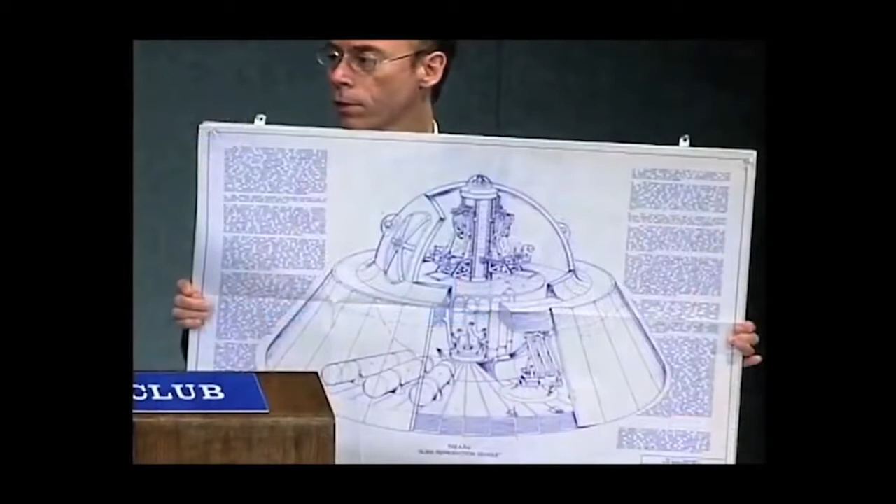He'd spent over a decade in research and development on the main focus of the NPC event, technologies connected to UFOs and extraterrestrial vehicles. His detailed technical illustration of a purportedly reverse-engineered alien craft, the Fluxliner, a strange flying disc shown at a secret US Air Force air show in 1988, was a highlight of the conference. These discs were hovering off the floor without any visible means of support. They were referred to as alien reproduction vehicles, also nicknamed the Fluxliner because they used high voltage electricity.

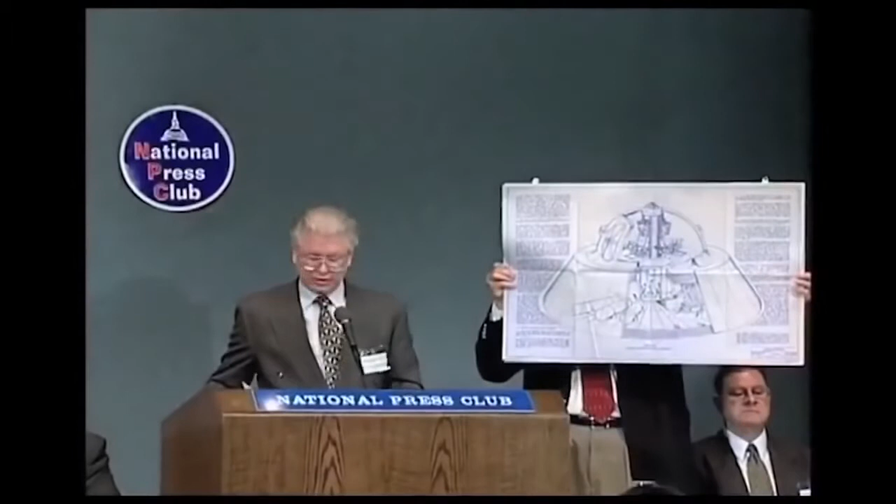This is a diagram that I made based on a sketch that Brad Sorensen did for me in rough form, and subsequently cleaned that drawing up and made it much more accurate. This is his story. He says, you know, I gave you the basic verbal description of what I saw. But somehow or other you've taken all the information I gave you, and you have graphically interpreted it into an image that is so close and so accurate. He said, this is really dangerous stuff here.

Deanne Divis with United Press International. Could you please address the vehicle that there was a drawing displayed of? Why would this vehicle be on display at an air show? What is the power source that you are asserting is going to be so very useful? And how can you determine that this vehicle is not something that is being developed by a government agency? In fact, I think that was the testimony.

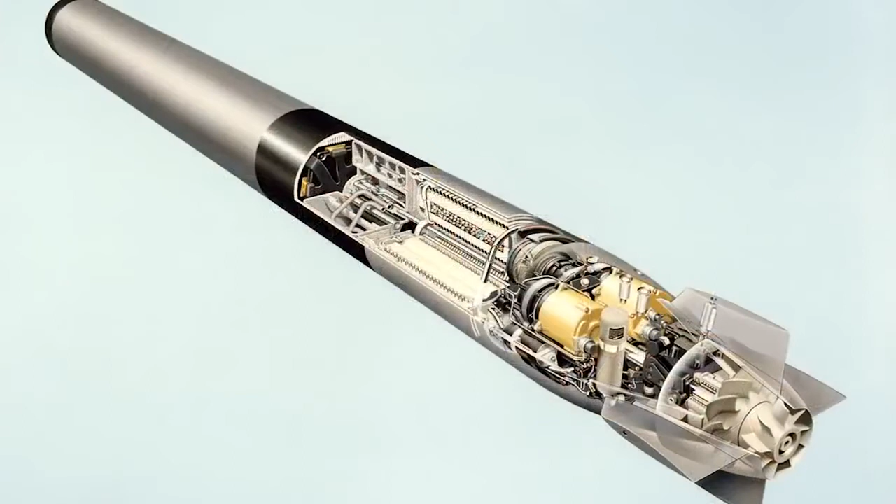At the time, this was around 1985, 1986, and I had been freelancing for about 4 years at that point. Done a lot of work for Lockheed, a lot of work for Rockwell, and a little bit of work for Boeing. And so I was establishing a reputation and had occasion to talk to an awful lot of experts in the field, various parts of the aerospace industry. So I had an idea of what was going on in terms of the technological development that was occurring in the industry at the time. Worked on some conceptual artwork showing cutaways of some of the weapon systems and how the components inside those weapon systems interrelated to one another. I was given a lot of information.

Many times I was asked to create illustrations for clients based on just verbal descriptions of what they wanted to see, because a lot of it was conceptual artwork that was supposed to put across the idea that, say, a particular aircraft that they were designing was going to be extremely fast, so it had to have all the sort of dynamic characteristics of what a really fast aircraft would have, and I had an idea of what these things looked like. So I was subscribing to some of the trade publications that were available at that time, like Aviation Week and Space Technology, and knew a lot of people at the magazines, test pilots, editors, and things.

By the mid-1980s, he was a very successful professional artist living in Rialto, California. He had a full slate of high-profile projects and had become a very sought-after and respected talent in a very crowded field of designers and artists. Despite living in the era of Reagan and disco, things were going very well for Mark. Then, in the autumn of 1988, things took a turn for the weird.

Well, it turns out that this was in October that the magazine hit the newsstand. It was a November issue of Popular Science. It was called the Mach 5 Spy Plane. And a friend of mine from college, Brad, had seen this cover illustration and had opened up to read the story, and he recognized my name, and he called the art director. He passed along my phone number, and the next thing you know, I get a phone call, and this fellow calls up and says, "Hi, Mark, it's Brad. Remember me?" And I said, "Yeah, we were in the transportation design curriculum at Art Center in Pasadena when we studied car design." So we got reacquainted, had lunch together.

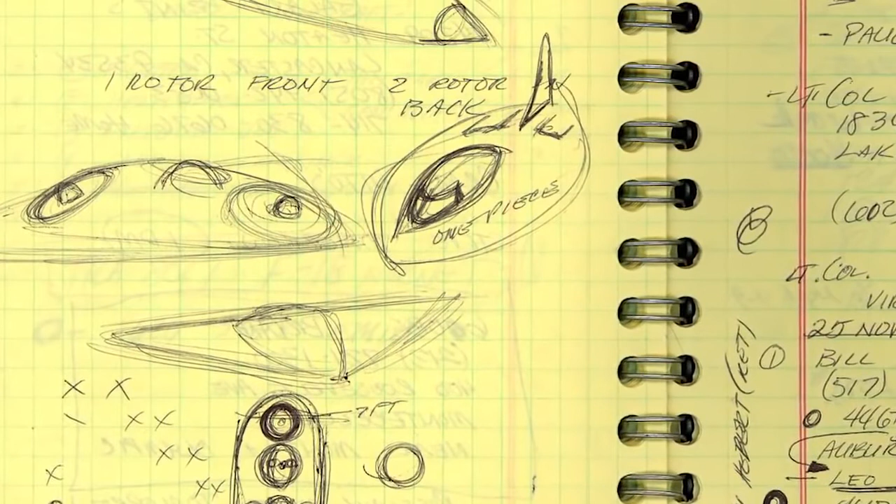And then he described a number of sort of odd-looking hovercraft and troop transporters and things that were basically just kind of jazzed up, advanced hover vehicles of one kind or another. And after going through all of this, I said, "Well, even this doesn't sound all that extraordinary. I mean, is there something else?" And he says, "Well, yeah." He says, after they had the main little dog and pony show, they pulled back the curtain and there were these 3 flying saucers hovering there.

And I couldn't believe my ears. I said, "No, wait, did you say flying saucers?" He said, "Yes." And I said, "Well, what do they look like?" He says, "Well, it looked like something from the 1950s, like a jello bowl, flat on the bottom, sloping sides, a little terrace around the middle, then a dome on the top with all these little bubbles around the top, and a door that looked like something off of a submarine, you know, with the little pins that go out into the frame of the door, and the big wheel that you turn to tighten it, all this kind of stuff.

The smallest one was about 24 feet in diameter at the bottom end of the craft. The medium-sized vehicle was about 60 feet in diameter, and the largest was somewhere between 125 and 130 feet in diameter." I said, well, what were they doing? Were they just sitting on the floor? He says, no, they were hovering. There was no landing gear, nothing holding them up, no cables. They were just hovering.

There was a 3-star general that was part of the presentation. When they pulled back the curtains and these three flying saucers were revealed to the audience that had been brought there to this hangar, this general got up and he was describing these vehicles. He described them as alien reproduction vehicles, ARV for short.

They also had a nickname for the aircraft. They called them Fluxliners. Now, flux is an electrical term for a high electrical charge. So, high electrical charge liner, a Fluxliner. And so he got kind of scared. He stopped talking. And so I said, well, let's have lunch. He was nervous about talking about it on the phone.

So I go over there and we start talking. And as he's describing this stuff, he's describing the different features that he had seen. And well, how do you know that? I mean, if you could just look at the outside of the vehicle, how do you know what the inner workings is? He says, well, they had taken some of the panels off the outside so you could see the inside, what the components looked like.

And he said it was remarkably simple. There wasn't that much to it. And I said, you were able to figure out how it worked from that? He said, well, no, they had an easel next to it with a drawing, a cutaway drawing, that showed some of the internal components, how they were arranged and oriented to one another.

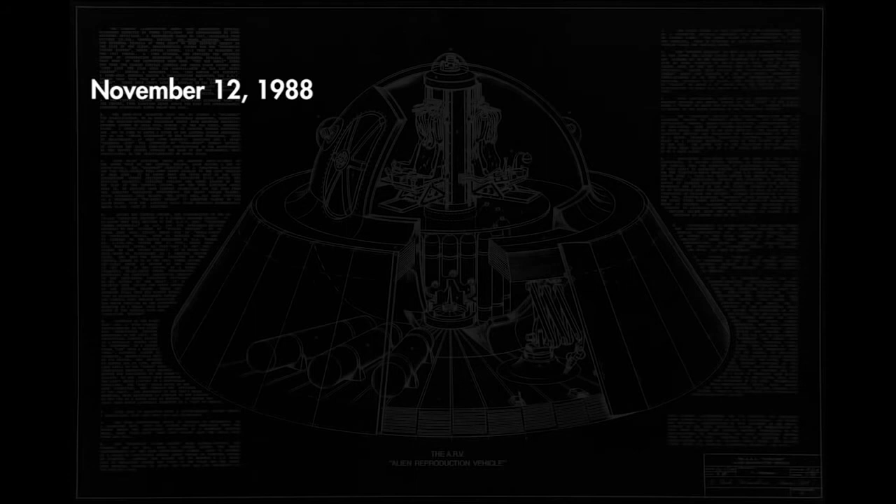So, according to his account, on November 12, 1988, Mark's friend inadvertently gained access to a highly classified airshow where the featured hardware of the event was real flying saucers. They were really strange looking, but appeared functional and were named to suggest anti-gravity and reverse-engineered alien technology. An official present stated they could travel faster than light.

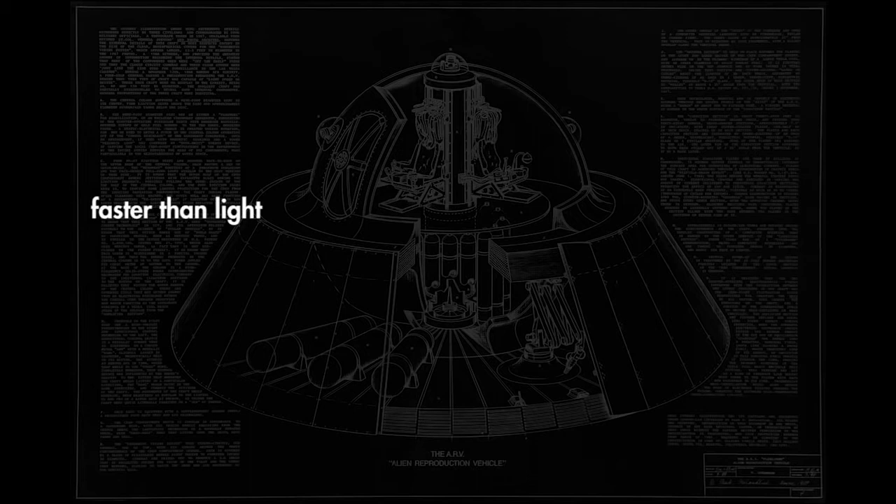Despite their futuristic performance capabilities, these appeared to be stripped-down, road-worn working prototypes, which had seen practical operation for years. If this were the case, they were crude but tangible proof of concept for a staggering leap in aviation technology.

They used extremely advanced electromagnetic or field propulsion, as opposed to solid or jet fuel, nuclear power, or any other commonly known conventional means. It also meant our government and at least one other major defense contractor, Lockheed Martin, had been developing and deploying functional systems along these lines for many years.

To both McCandlish and Brad, who'd been working professionally for some time within what they thought were the highest levels of aeronautical design, this odd system was a sucker punch from the future. Apparently this had had a really, really serious impact on Brad, and he really seemed kind of stunned by what he had seen.

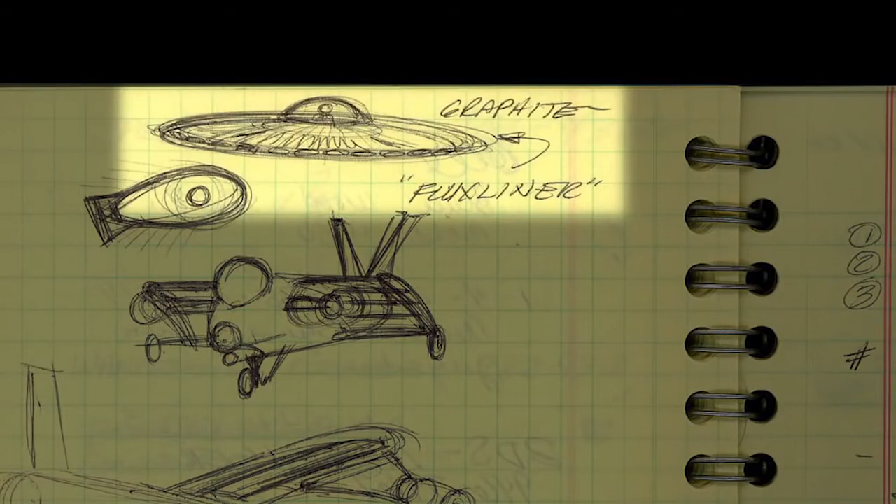So we got together for lunch, and I was doing all these idea sketches of what he described to me about how the components related. And I had your stereotypical sort of lens-shaped flying saucer like you see in more modern movies and stuff. And he said, "Oh, no. It's real simple. It's flat on the bottom, sloping sides like a section taken out of a cone, a little ledge, and then a dome on the top."

And he said the dome is actually the top half of a crew compartment that's like a big ball. I'm pretty sure that was about 12 feet in diameter. There's a central column that goes down through the middle. There's like a flywheel thing on it, maybe 6 to 9 feet in diameter. There's 4 ejection seats that are all back to back on this central column above the flywheel type thing. And he says a bunch of oxygen tanks in there that are all around the bottom.

And he said the bottom is this huge capacitor array. It's probably maybe 12 to 14 inches thick. It's shaved off at an angle on the edges, looked like it had been put on a big giant milling machine, and they milled off the edges at a 35-degree angle. He said there's a series of these plate capacitors.

I said, "Well, do you think that this is functioning like the Biefeld-Brown effect, like these experiments that were done back in the 60s with levitating things with electrostatic fields and stuff?" He said, "Well, that may be it," but he says, "They told me, one of the things I saw was that it was using zero-point energy, it was using scalar energy." Really?

It's cool, huh? Zero-point energy. I save the best inventions for myself. Well, I'd been corresponding with Tom Bearden for about 8 years at that point. We talked many times, mailed letters back and forth, talked on the phone and things.

Okay, so what we have is a very strong argument that neither the scalar photon, that is the time-polarized photon, nor the longitudinal photon, which is over in 3-space, are individually observable. But if you somehow can combine the two, they are observable as the instantaneous quantum potential.

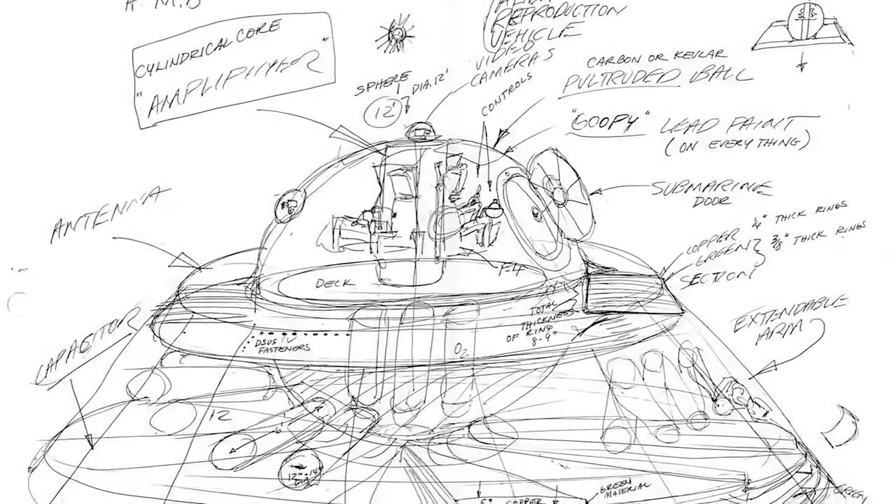When Brad finally became frustrated with my questions, he sat down while we were in his office together, and he did this rough sketch, which I still have to this day, 22 years later. Right where we were sitting at his table, he sketched it out with an ink pen on a piece of legal-size white paper, and put some little handwritten call-outs around

the edges that described the number of capacitor plates in each one of the little sections, that they were so wide at the end, and the crew compartment was definitely about 12 feet in diameter. He just put all these things down as close as he could remember to the way they existed. And so I sat down with all this information, and I just began drafting it out.

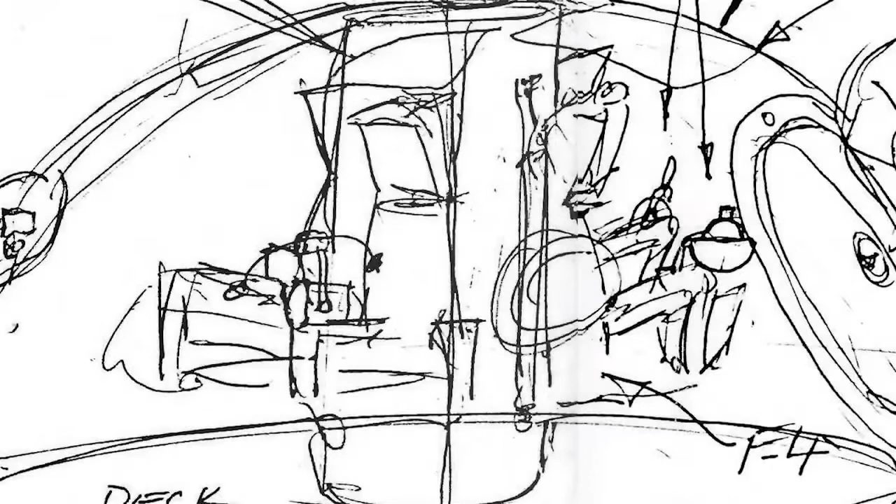It was at this point Mark began putting his formidable skills as a conceptual illustrator to work in uncharted territory. Taking Brad's eyewitness account, detailed descriptions, and rough sketches of the ARV, McCandlish began refining aspects of the components his friend described and piecing together an ever more precise rendition of the craft.

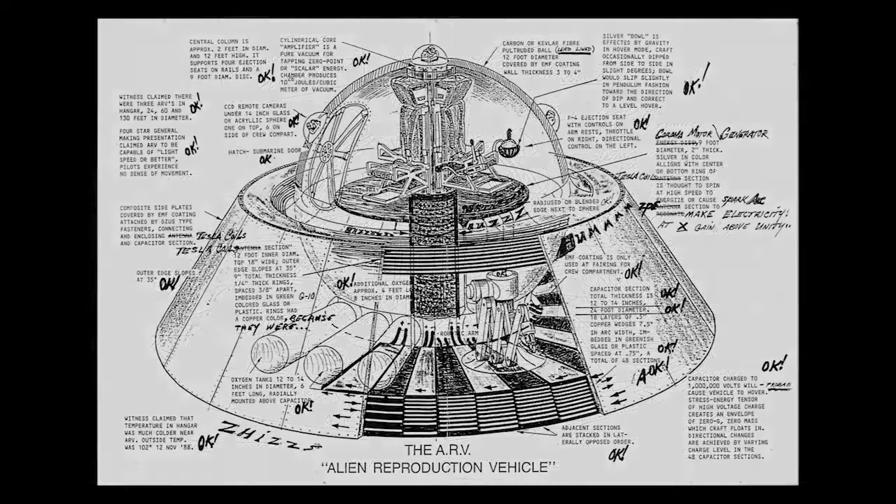Over the course of the next few years, he generated a series of drawings, culminating in the Fluxliner cutaway blueprint, one of the most notorious images in the history of ufology and the mysterious realm of black-budget aircraft.

I'm Jesse Ventura, and this is Conspiracy Theory.

This was called the Fluxliner. This is probably the strangest one you've shown me yet. This actually flies? It actually flies on the principles of high voltage electrical charges.

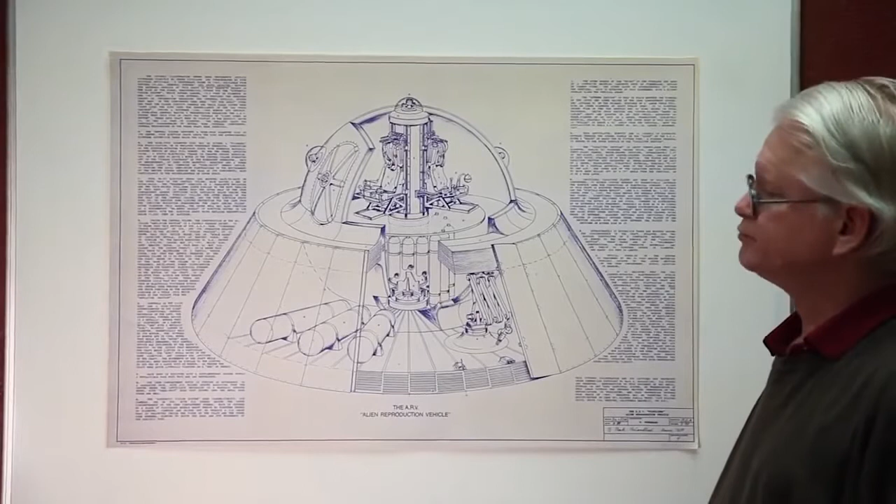This is the original, one of the original blueprints of the alien reproduction vehicle, which I produced in March of 1989. It was put together by accumulating a lot of verbal testimony from Brad and later from a number of other sources, including Kent Sellen and some other people that I talked to who had some contact or information about the vehicle.

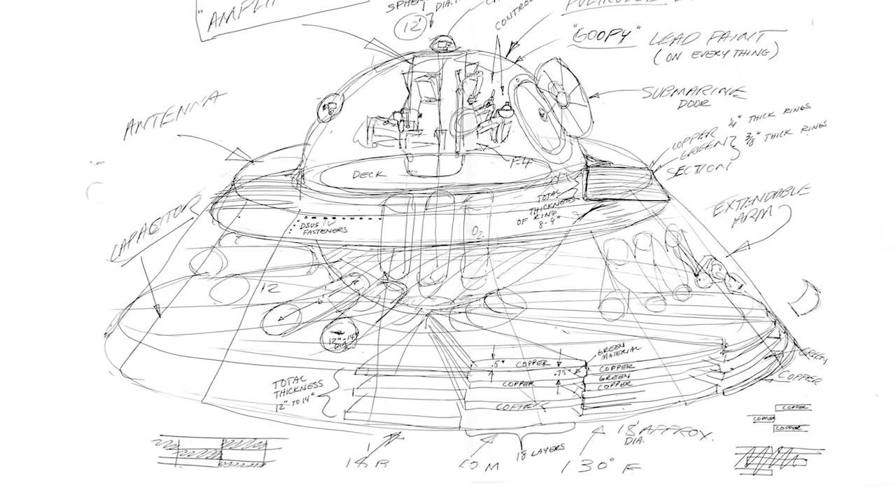For Mark, his friend Brad's initial account was a fascinating story with a degree of veracity and plausibility, worth exploring and doing some research, but was after all just one man's tale of a fairly unbelievable event, concept, and machine.

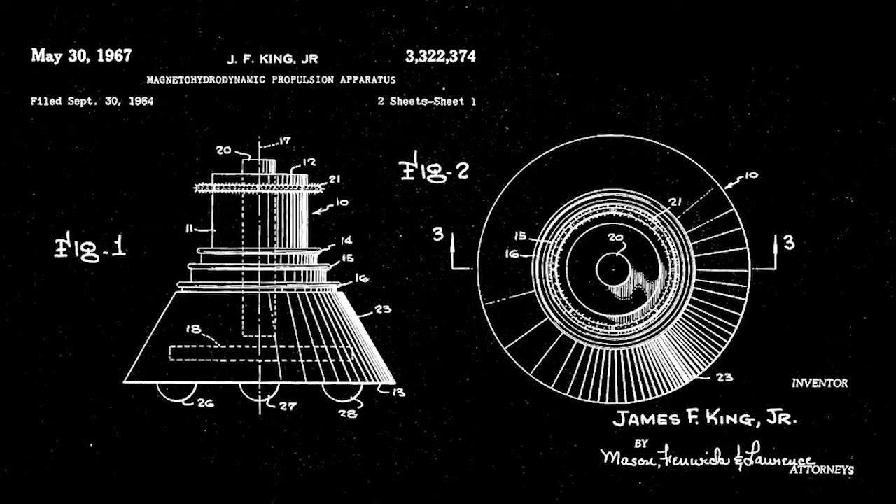However, this subsequent research led Mark to some other very compelling eyewitnesses, official documentation, including numerous scientific patents, and other sources, such as respected quantum physicists, which finally convinced him of the likelihood that the ARV might be a very real thing.

The first verification of the story that I picked up on the alien reproduction vehicle was around 1991, 1992. It was the first air show at Edwards Air Force Base where they actually had the B-2 stealth bomber on display.

In the course of that air show, I had occasion to join up with some clients from Rockwell International, and they introduced me to this fellow who claimed at the time that he was working with the Air Intelligence Agency. His name was Kent Sellen. He claimed that he had inadvertently seen this same craft at Edwards Air Force Base North Base facility in 1973.

And I said, when, how, where, what were the circumstances? He says, well, I was a crew chief. He said, I worked on Bill Scott's plane when he was a test pilot. And he says, one night my shift supervisor said to me, go out to North Base. They've got a power unit out there, a ground power unit for an aircraft that's leaking or failed or something, so we need to take a tow vehicle out there, go out, pick it up, bring it back.

Well, instead, what happened is he comes up off the dry lake bed, rolls right up on the tarmac, and is going down these rows of hangars. They're all Quonset-style hangars back then. And he stops in front of the first one with the doors cracked, expecting to find this defective ground power unit, and what does he see? He sees this flying saucer sitting in the hangar, hovering off the ground.

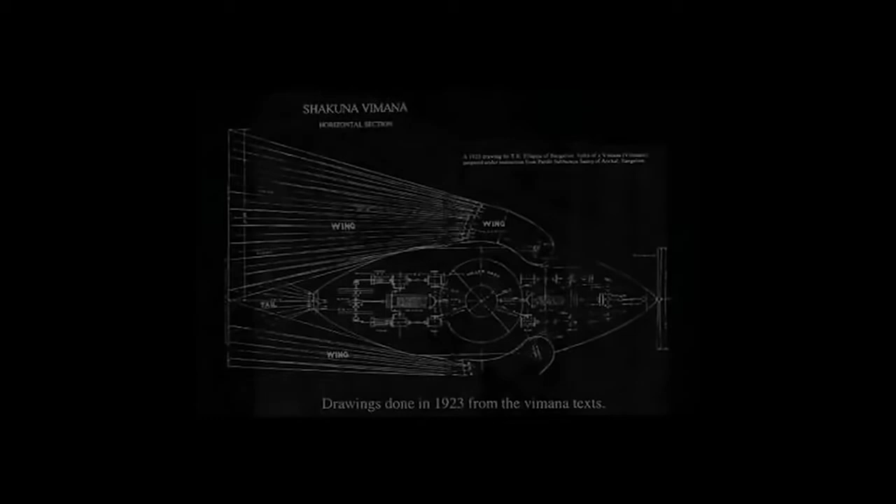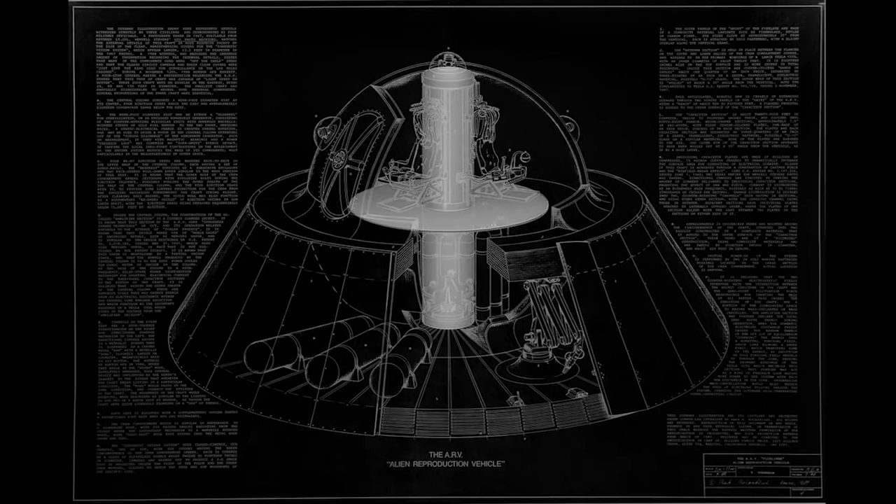Strong and durable must the body of Vimana be made, like a great flying bird of light material. Inside, one must put the Mercury engine with its iron heating apparatus underneath. By means of the power latent in the Mercury which sets the driving whirlwind in motion, a man sitting inside may travel a great distance in the sky.

One of the things that they described when you read up on the literature surrounding these so-called Vimanas was the so-called Mercury vortex or Mercury turbine engine. I see the word Vimana. Can you describe how that relates?

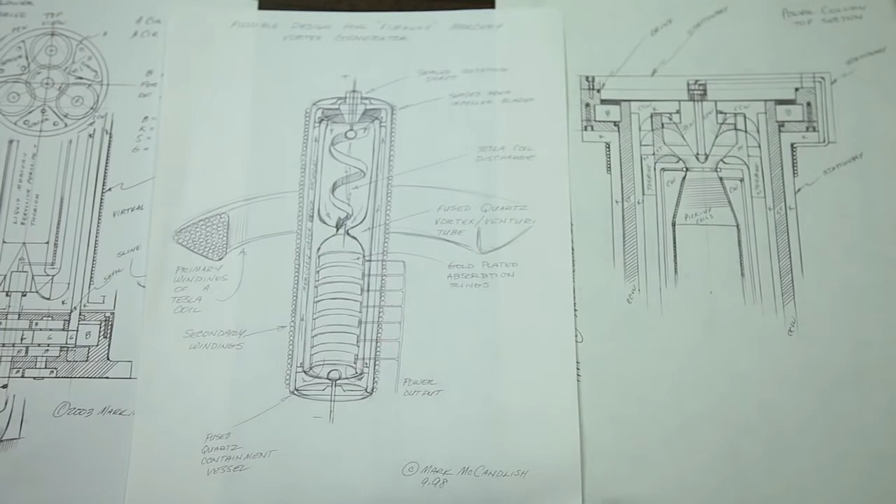Well, this is something that I spent a lot of time reading up about, the so-called Mercury turbine generators or Mercury vortex generators described in some of these ancient Sanskrit texts. And so I started looking at the possibility that there had to be some kind of circulation going on in the Mercury itself. So that was the kind of thing that I visualized would be going on inside the chamber. The central column has a number of components, a couple of counter-rotating cylinders.

It sounds very much like the device that the Nazis were developing in the Wenceslas mine in Poland towards the end of the Second World War. There seems to be some evidence that they were trying to develop some kind of an anti-gravity propulsion system or a zero-point energy device. Apparently, if we're talking about systems using components and processes similar to the ARV, we can't ignore the Nazis.

I think it was Timothy Good published a story, maybe Above Top Secret, where he found a researcher who was following developments by the Nazis at the end of the Second World War, and it looked like they'd been developing flying saucers up in Poland in the Wenceslas mine, and they had this thing that looked like Stonehenge, where they had all these high voltage cables coming into it and these chains that would hold something down, and they had this thing called the bell, Die Glocke. The bell.

That was down in this mine in Wenceslas, and it involved a ceramic dome, and it had two cylinders inside with a mercury solution circulating in it. The two cylinders were inside an electromagnetic field, and they were counter-rotating, and they had this mixture of mercury, thorium, and beryllium. Now, it looks like there's a high-voltage electrical discharge that's being sent through the mercury, and that is somehow doing something that enables this anti-gravity effect to occur.

Besides rumors about Hitler's top scientists and the mythology of ancient kings, there were other instances where a central core involving mercury and other components similar to the ARV were reported. At one point, Mark contacted and interviewed possible UFO abductees to gain insight on the technology they may have seen in the alien craft, something he had in common with McDonnell Douglas in the 1960s, and possibly numerous other corporate and government entities since the 1940s.

I wound up going to my management and telling them, you're not going to believe this, but the UFOs are clearly coming from someplace else. They're clearly manned or humanoided, and the only question is whether we're going to figure out how they work before Lockheed or after. And so as a result of that, the company at that time, which has now of course been bought by Boeing, over several years put in about $500,000 worth of research effort under my direction to study gravity control techniques and also analyze UFOs.

We hired a police detective to interview witnesses, abductees. We had experimental work and theoretical work. So it was kind of a fun project. In the course of all this, it occurred to me that one of the other resources that I might be able to draw on was people in the alien abduction community. I began to think, well, these people are either crazy or they're really having an experience of some kind. And some of them even talked about implants that were being recovered from their bodies.

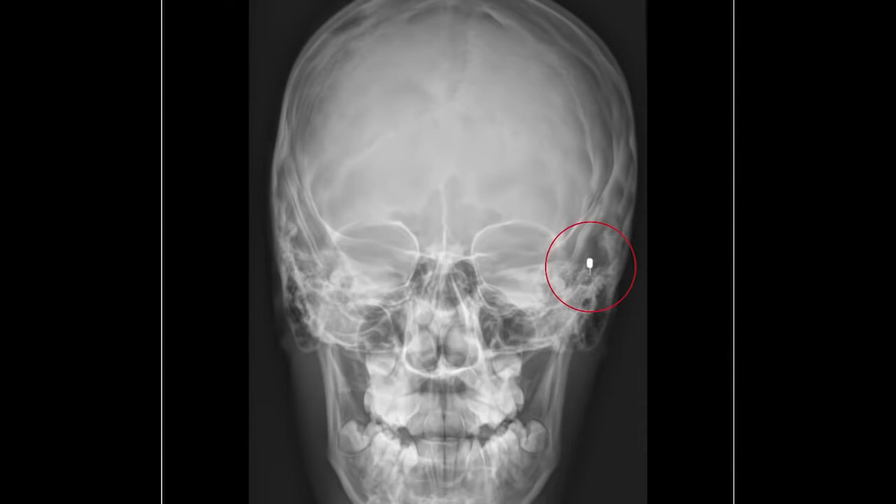Contacted the station. They put me in touch with these three young ladies. I interviewed them individually, and much to my surprise determined that these young ladies seemed to be bona fide examples of the phenomena, with implants that could be seen on medical X-rays. So what I did was I simply asked them to describe what they saw, and without disclosing anything that I already knew about the components inside the alien reproduction vehicle, I found that at least one of them in particular was able to describe not only components that strongly resembled the ones inside the alien reproduction vehicle, but they were also at a higher level of sophistication that actually gave additional clues about how the ARV actually functioned.

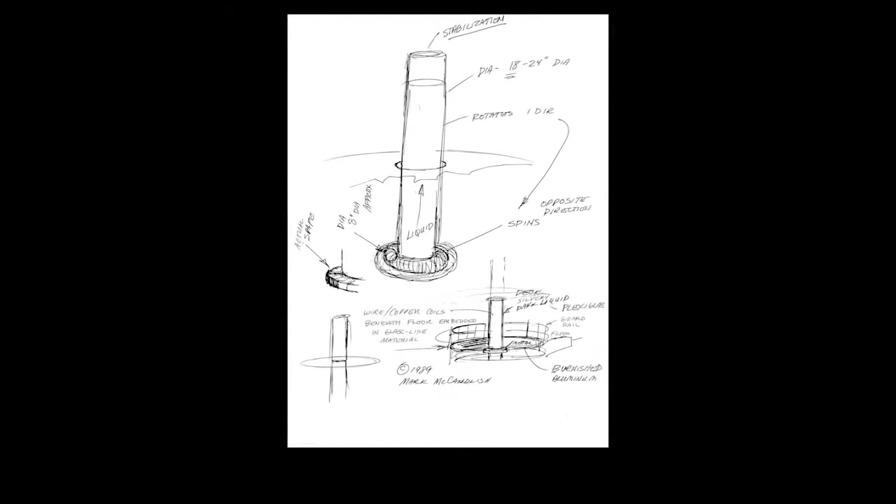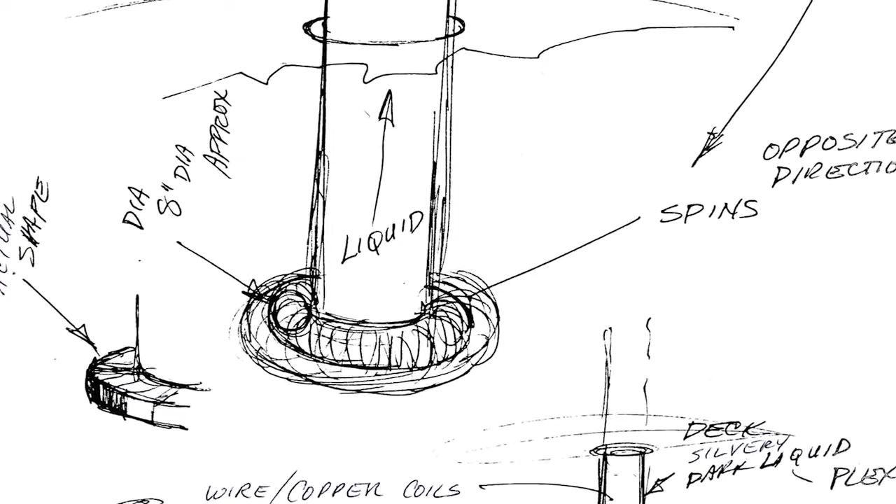Alicia Davidson described being escorted into the engine room and seeing the propulsion system components. It involved a central column made of a transparent glass-like material, and she said there was a silvery fluid spiraling upward at the bottom of this column. Down in this well in the center of the spacecraft was a tiny flywheel-like mechanism spinning, which matched the ARV also.

And this is at a point when this young lady had never seen any of the drawings I'd done of what the ARV was structured like. I was just talking about propulsion components in general. But then she said that when you looked across this little well, this lowered floor area in the center of the room, there was like a guardrail around it.

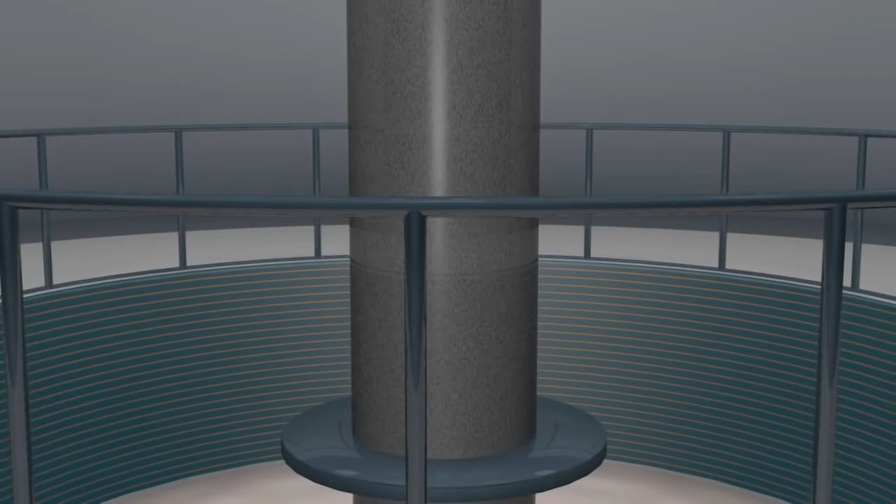She stood there, so you could look across, and she said it looked like below the deck she was standing on was this glass-like material with coils of wire going through it. And they were spaced out in the same proportions as the ones on the ARV.

The most significant thing she said was that the column itself was rotating in one direction, and the flywheel was spinning in the opposite direction. There was counter-rotation, which is something that's often been reported in UFO sightings. You see components on the craft spinning in opposite directions.

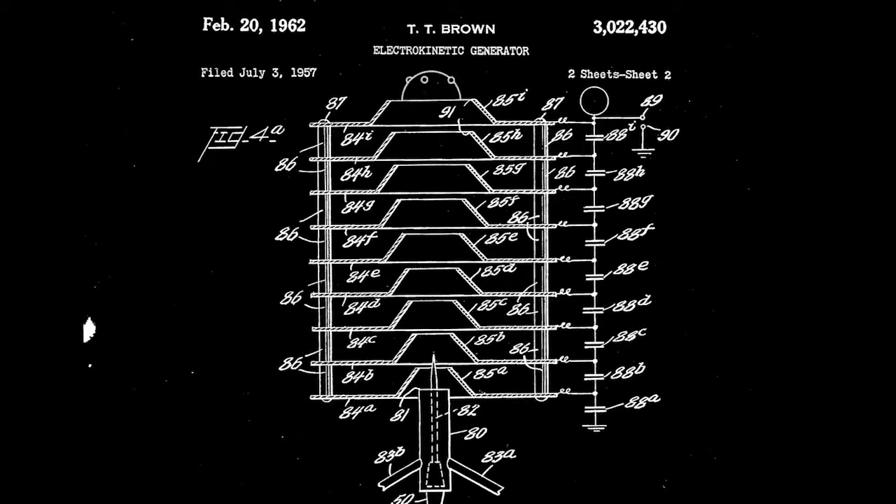Back here on Earth, the scientific community has been busy since the end of the Industrial Revolution. There have been dozens, perhaps hundreds of US and international patents dealing directly with electrokinetics and electrogravitics, going back to the turn of the last century. It would be safe to assume private industry and the military have also been working on related applications off the public record. In short, since Nikola Tesla's first experiments with pushing electricity around, mankind has had a thing for anti-gravity.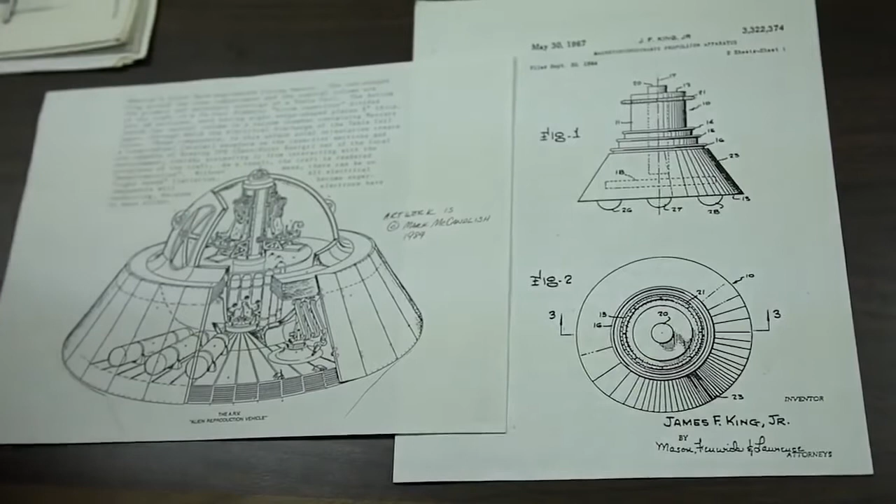If you look at these two illustrations, this is a patent secured May 30th, 1967 by James Frank King, Jr., who happened to work with Thomas Townsend Brown in the labs of Agnew Bahnson. You can see a striking similarity between the two vehicles. On the one hand, you've got a sort of frustum-shaped fuselage section.

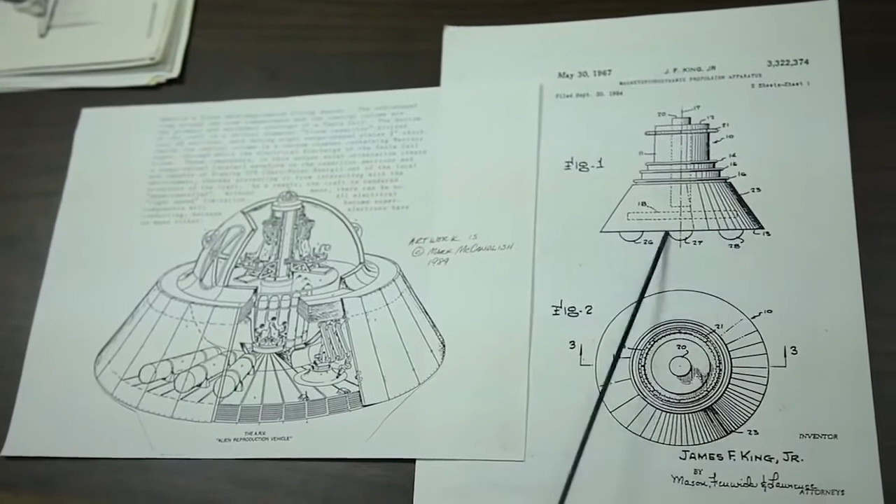You've got a series of coils that wrap around the crew compartment, although the crew compartment in this instance is more of a cylinder. But you also have a central column that goes down through the middle, and this capacitor section in the bottom. And then you have these little flight control mechanisms here. I find it really remarkable that there's so much similarity between the two objects.

And when is that patent from? May 30th, 1967. It's called a magneto-hydrodynamic propulsion apparatus. And so I started thinking, maybe it's like a cyclotron. Maybe there's an electrical discharge from this. Basically, this whole thing looks like a giant Tesla coil. It's got the capacitor array. It's got a central column that looks like the secondary windings of a Tesla coil.

And this might even go back to something Nikola Tesla discovered back in the 1940s, and it was all hushed up, and all the UFO sightings we've ever seen were something that came from Nikola Tesla and not from another planet. These are the things that were all going through my head at the time.

So it was really surprising to find all the different sources I encountered that seemed to provide useful information as to how this thing was made, how it worked, what its energy sources were, and it was all really fascinating to me, and that's one of the reasons I pursued it. It wasn't because I was trying to breach national security. I was just insatiably curious about how these things work.

And he said it was remarkably simple. There wasn't that much to it. The ARV system, for all of its claims of flashy, out-of-this-world propulsion capabilities, was indeed remarkably simple. It could be described as a large-scale, souped-up Tesla coil, designed to negate gravity and inertia, with off-the-shelf navigation and life support systems bolted on, almost as an afterthought.

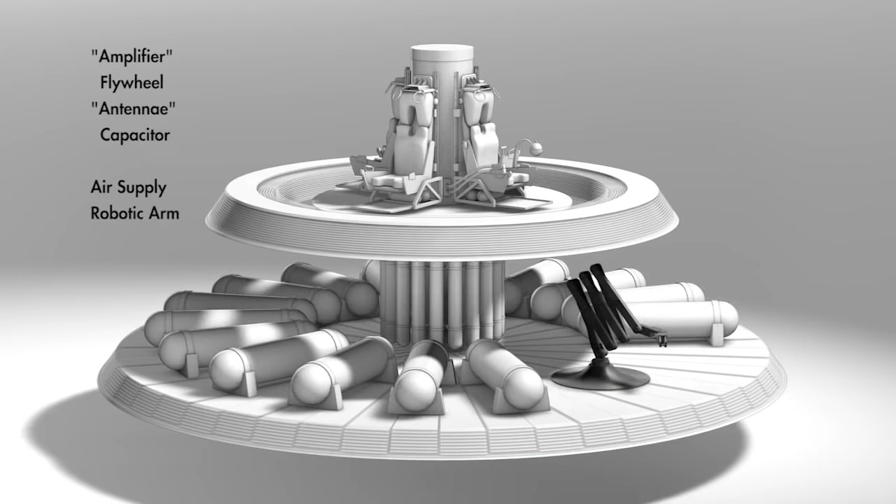You could think of it as the Model T of anti-gravity vehicles, an industrial dune buggy, or crude hot rod that can get you to Mars in a few minutes. In this version at least, first-class seating was still a way off.

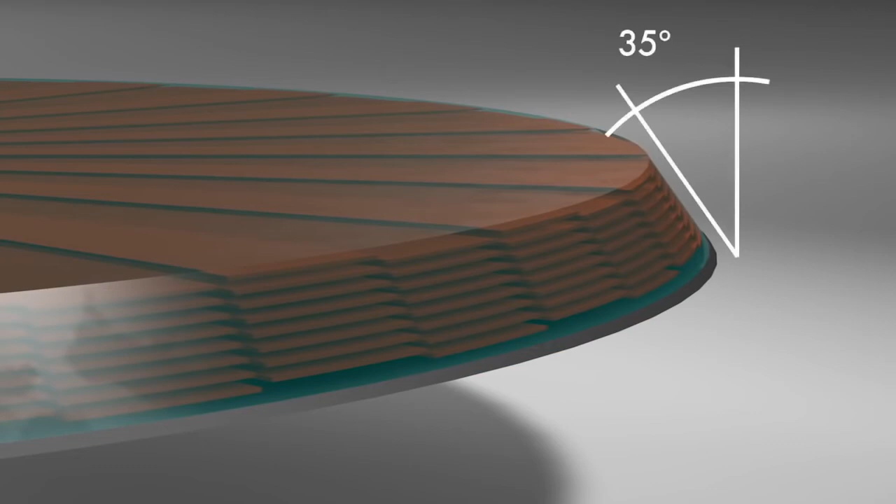From everything I've been able to gather, it helps to understand what some of the components are. There's a large capacitor array on the bottom of the craft. In the smallest version, it's 24 feet in diameter. The outer edge of the plates and the capacitor section itself are shaved off at that same 35-degree angle. So you have a series of plates that are progressively smaller as you get higher and higher in the stack. And there's 48 sections that are all set up like that.

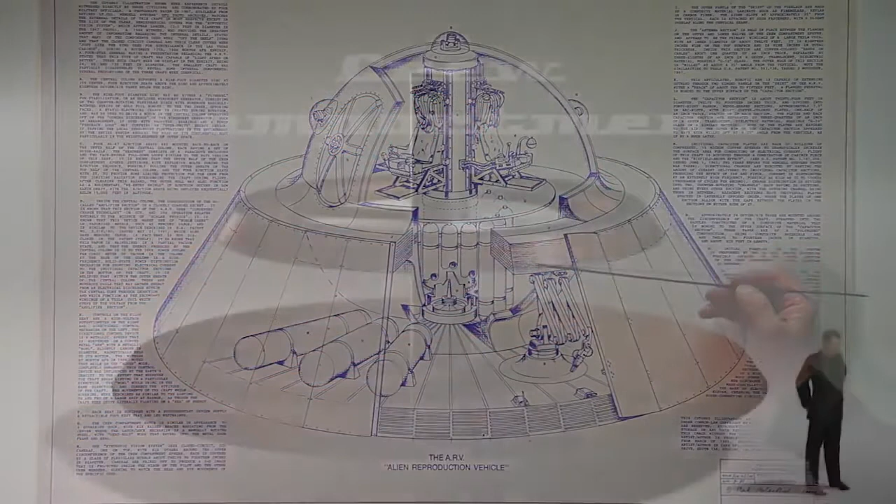Through the middle of the crew compartment is a central column that's called the amplifier section that's in the middle of the craft. On the very center point of that column is what looks like a large 9-foot diameter flywheel type mechanism. Then around the belt line of the crew compartment is about a 2-foot wide coil of wire that's embedded in the same glass-like material that the capacitor section plates are embedded in. And there's a kind of flange or fairing that traps the top and the bottom surfaces of the coil. You can see that it traps it there and at the top. But in between are a series of explosive bolts that run all the way around the craft.

They said above this ledge there is what looks like a door out of your stereotypical cartoon submarine. It has a steel frame that's embedded in the side of this protruded sphere that makes up the crew compartment. And he said it had a wheel on it with little spokes that you would turn, like an old Captain Nemo submarine, with the pins that would go out and lock into the door frame, and it had a seal on it so it'd be airtight.

And then the ejection seats are mounted back to back. There's 4 of them in the smallest version of the craft, and they're mounted on this central column on a set of rails. In the event of an ejection, the explosive bolts separate the top and the bottom halves of the crew compartment, and the entire outer sheath of the central column pulls away along with the upper half of the crew compartment and the ejection seats.

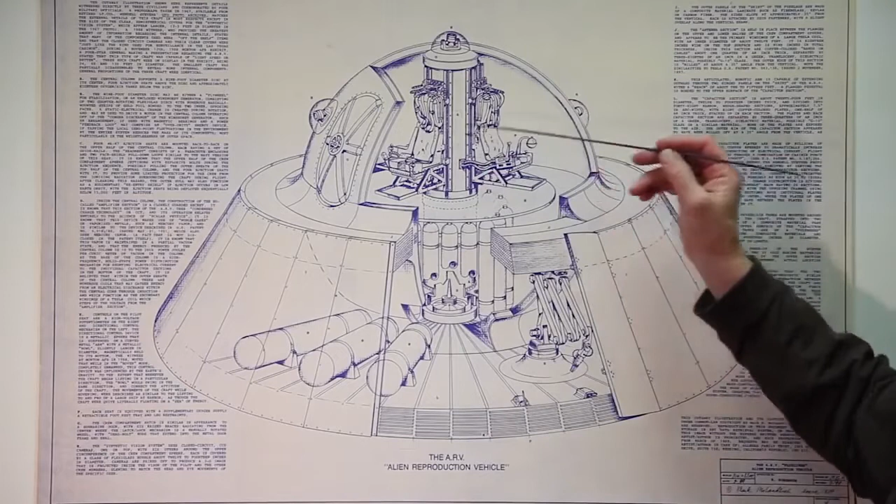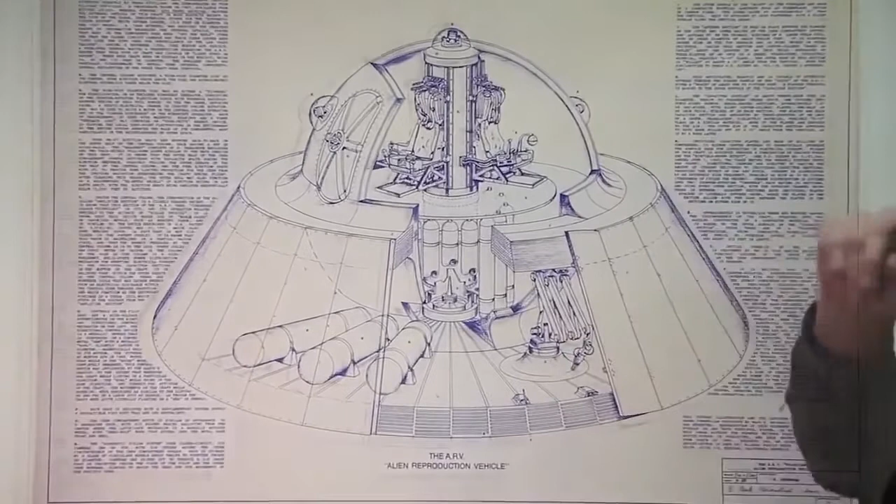This crew compartment sphere can actually function as kind of a rudimentary re-entry vehicle coming down through the atmosphere, and then once you get, say, below 14, 15, 16,000 feet, the thing will pop a chute out the top, and the ejection seats drop off on these rails one by one, and the pilot can drift down with a parachute. Because this flywheel-like mechanism is turning all the time, the individual pilot or crew members have a kind of a pan that's right below the front of the ejection seat that affords them a place to put their feet.

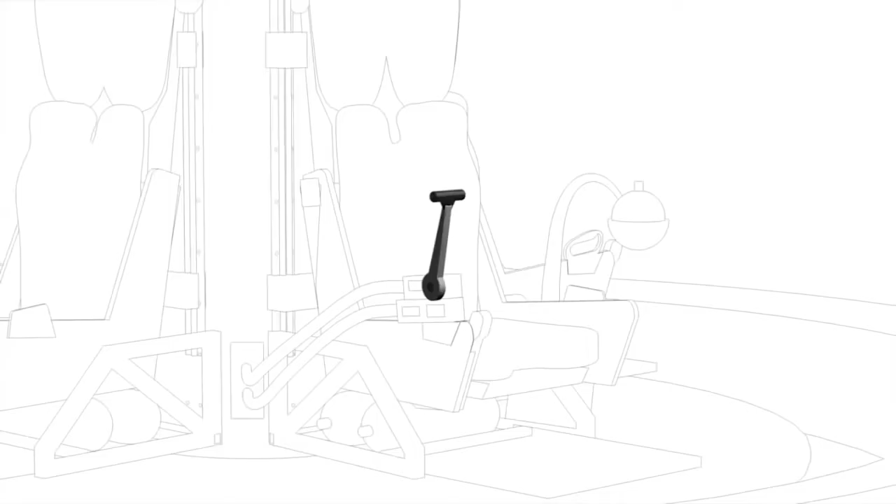Now, the control system on the ejection seat that the pilot sits in: on the one hand it looks like a high voltage potentiometer or like a rheostat on the one side that has a couple of big heavy duty cables that come out of it and go into the central column, and that's basically the amount of power that he has in the system. And on the other side there was sort of an inverted J-shaped piece of metal that came up and over that had a sphere on it. Now on the bottom of the sphere there is sort of a bowl that's slightly larger in diameter, but it conforms to the shape of this sphere.

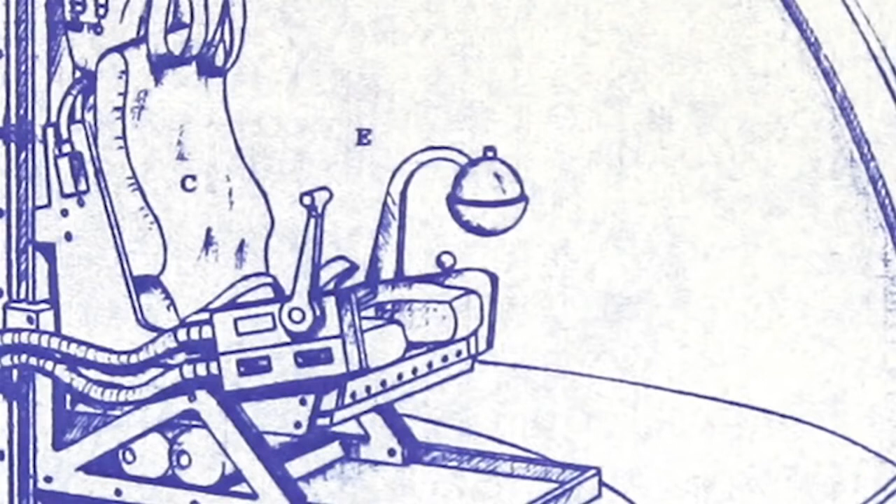Of all the components of the ARV, the navigation system, while perfectly logical and even elegant in its design, has to be the strangest one. It's an entirely unknown paradigm in steering an aircraft or anything else, yet makes perfect technical sense. If one were to make the case for truly alien aspects of the alien reproduction vehicle, this might be the first example they'd use.

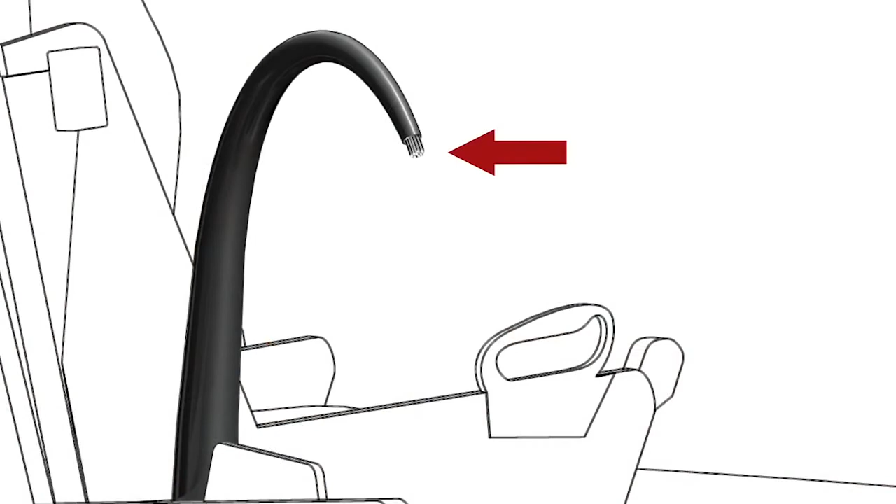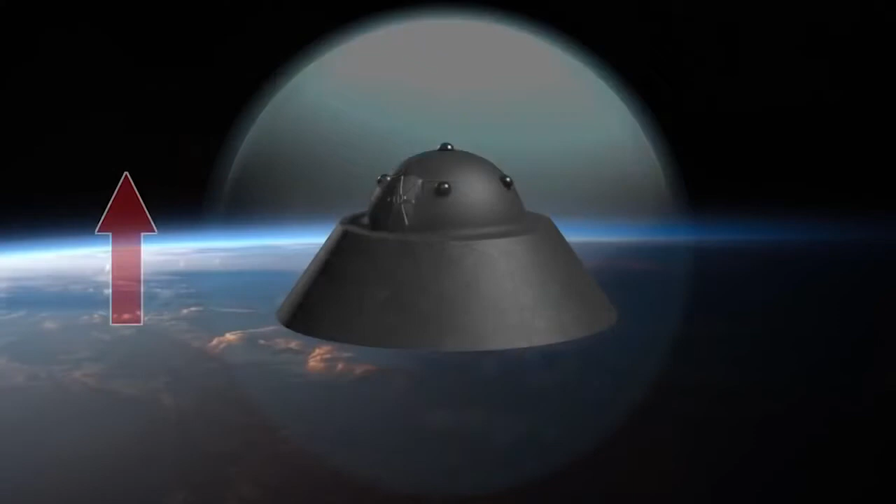The sphere itself appears to be a kind of a domed arrangement where you have a number of fiber optic leads that come into the sphere, and for each one of the 48 capacitor arrays there's a series of sensors that are then used to relay information to the individual plates. And so then on the bottom of this you have a bowl that moves around and can be used to convey the commands of the pilot in terms of shaping the field around the vehicle. And right in the center of that bowl is a kind of laser diode that sends a laser beam up into the inside of this sphere.

And so as the bowl moves, that laser is sort of scanning around on the inside of the different sensors that are responsible for each of the capacitor sections. Then there's a series of relays that will open and close and let a certain amount of energy in, or prevent it from going in. And when it's dead center, it means that all of them get the exact same amount of information. You just go straight up.

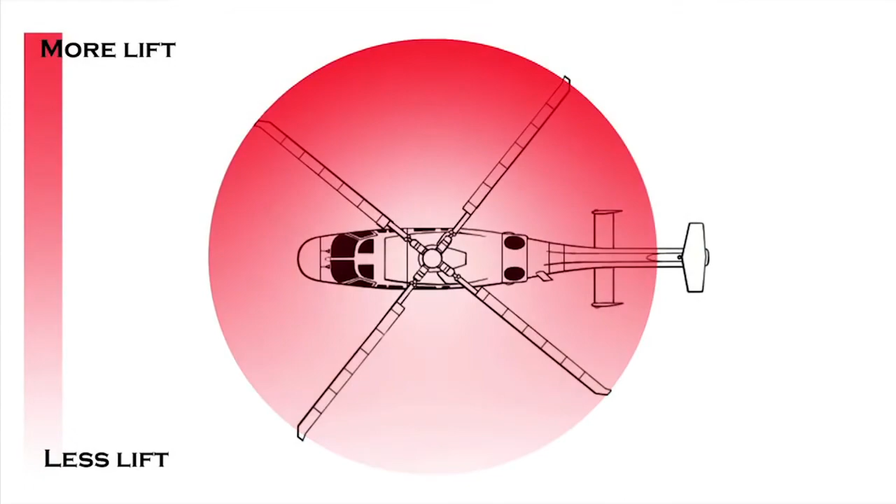If you want to bank to the right, then you bank this to the right. It sends the laser signal over to the opposite side of the dome, and it says that the opposite side of the craft is going to get more energy, so it banks in that direction. It's kind of like the swash plate of a helicopter. When you want to bank to the left, you create more deflection in the main rotor on the right side so that it begins to bank to the left. So it's kind of the same principle.

Then you have an oxygen supply that's strapped to the lower part of the central column down here in the lower part of the crew compartment. You have a much larger set of oxygen tanks, and these are all protruded vessels, by the way. There's no steel or aluminum in terms of the oxygen supply in the vehicle. There was also a pair of oxygen tanks under the seat, assuming that maybe you had to eject at 25 or 30,000 feet, and you needed some air to get you from up there down to where you'd actually be able to breathe ambient air.

I said, well, were there windows? And no, there weren't any windows. He said there was a thing called a synthetic vision system. And he said there were 6 or 7 of these little plastic bubbles around the top of this thing, one on the very top in the center, and then maybe 6 around about halfway up from where the ledge was to the very top, spaced at even distances. And he said in each one there was a little CCD camera.

So the synthetic vision system was set up so they would take 2 cameras with a converging point of focus, so that it would be just like looking through a set of binoculars. So you'd have a left and a right eye view, and it'd give you a 3-dimensional view outside the vehicle, but with no windows. And the reason for that, apparently, was that this aircraft was using extremely high voltages, and the voltages would ionize the air around the vehicle so much that it would start producing X-ray photons, which are absolutely lethal. So you have to have basically a barrier to protect yourself.

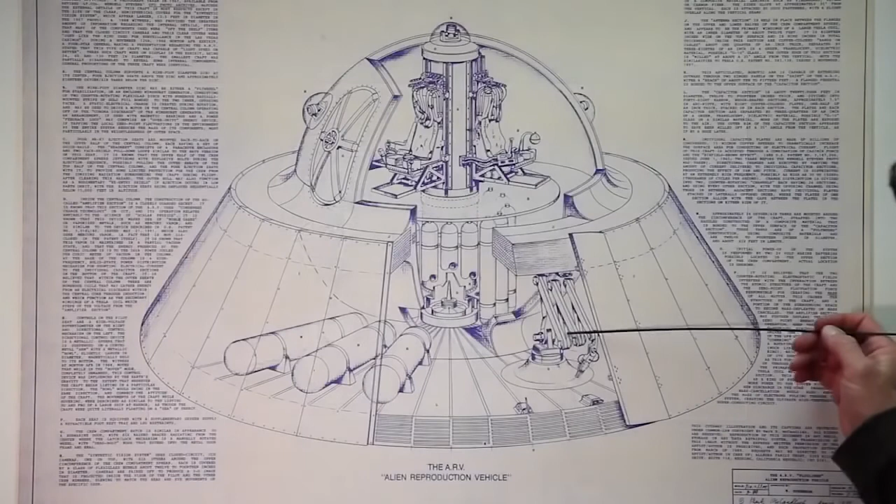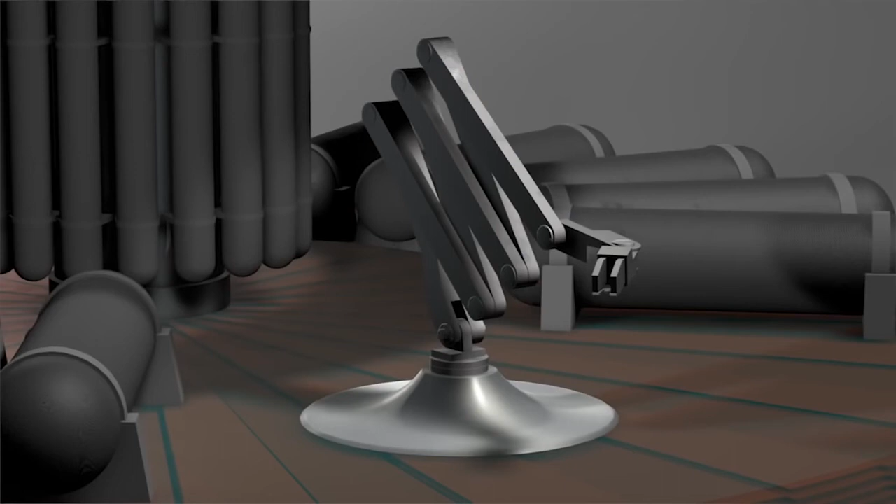You also have a robotic arm that seems to be blended in with a composite fairing sitting right on the top surface of the capacitor array that has the ability to extend outward with a little air-driven claw on the end of it. In fact, I think that the craft's electromagnetic field is probably so powerful that conventional little electric motors probably wouldn't work in this kind of an application.

Where they took the panels off the side of the aircraft, they had Dzus fasteners, these little quick spin lock things that they put on there to hold the panels. The panels are all like a fiberglass material. It's all composite. The entire vehicle appeared to be covered with what he referred to as a goopy lead paint. It looked like little flecks of lead suspended in kind of a resin and just painted haphazardly over the outside of everything on the vehicle, with the possible exception of the door itself and these little blisters that house the synthetic vision system.

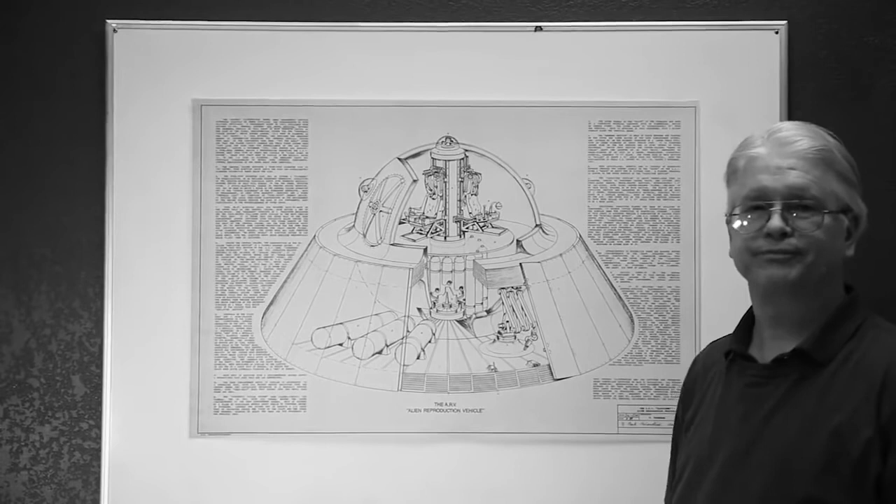So why would it be goopy lead paint? Well, the theory is that the electrostatic field created by this huge capacitor array and the ionization that occurs because of the propulsion system might be enough to create a level of ionization around the craft high enough that it would produce X-ray photons of its own accord. And so you would want to be able to protect the pilot and the crew members from that radiation. So anyway, that's the general overview of the structure of the vehicle.

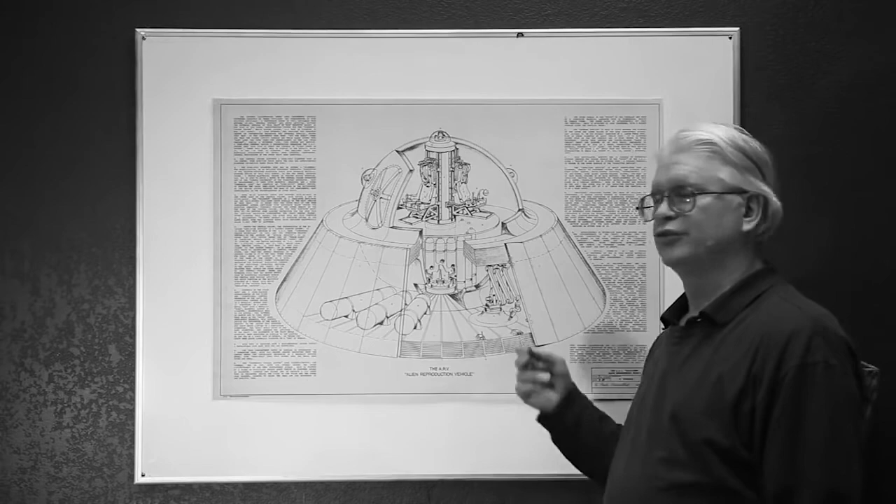This is a vehicle that has the ability to travel up to or beyond the speed of light. And part of the reason that it's able to do that is because it exploits the energy form that's embedded in space-time that's responsible for the effects of mass and inertia.

So here we have a configuration of various components, creating a system that's somehow capable of producing and maintaining an insane amount of energy in a concentrated field around the vehicle. This field can be precisely controlled by the pilot with the aid of a basic throttle, an alien steering ball, and a bunch of casino cameras.

There's plenty of onboard oxygen, handy if you're off the planet, and a lead coating so the occupants don't get fried in their seats, and a robot arm, in case you need a robot arm somewhere. It looks like a big clumsy diving bell from 1905, but apparently works like a helicopter you can take past light speed. Its beauty and elegance lie in the propulsion system, maybe a really fast one that gets around currently accepted physics, one we commonly associate with UFOs.

For anybody who has followed the work of Einstein or just basic physics, one of the sort of inviolable rules of physics is that there's no material object that can actually go faster than the speed of light. So somehow or other, and I'm not saying we got this from aliens, but they did call it the alien reproduction vehicle, but somehow or other, this simple system that Brad described in these diagrams was able to do this.

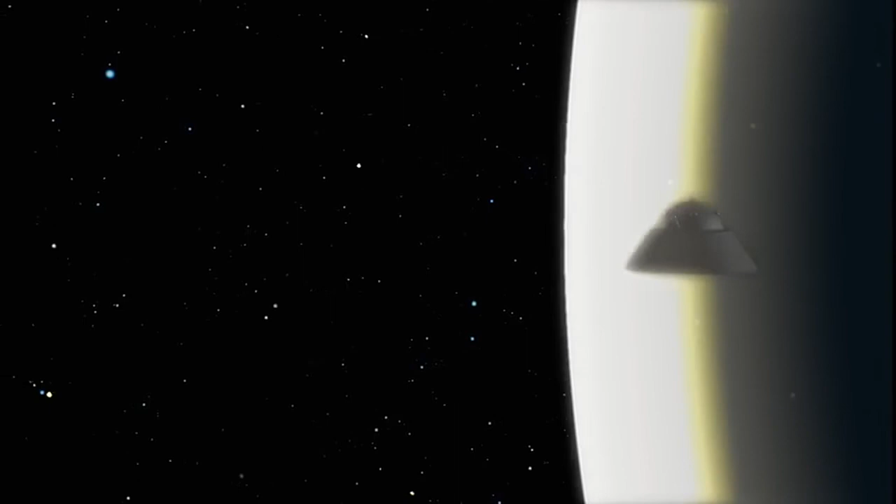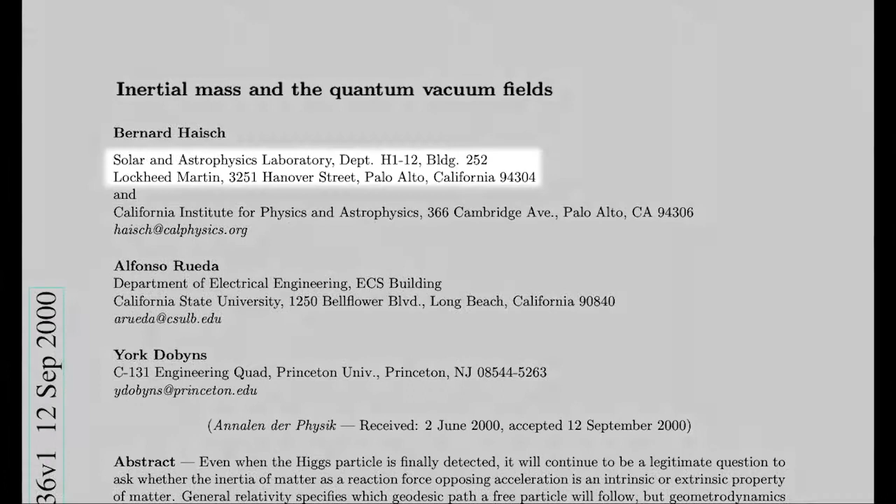So I began looking at the scientific literature. I was looking at this scalar energy, anything I could find on zero-point energy, scalar energy, quantum zero-point fluctuations of the vacuum, I think is a more technical physics term that they use in the literature. And it turned out that there really were scientific papers that were being published by a number of different scientists, Hal Puthoff, Bernard Haisch, Alfonso Rueda, who just happened to work at Lockheed Skunk Works, by the way.

So I started noticing the names and where they worked and what they do, what they were talking, what they were publishing. And it occurred to me that maybe these are people who have some insider knowledge. So I started looking at that. I started looking at the things that Hal Puthoff had said.

In the middle of last century, physicists made an astounding discovery. And that is what we ordinarily consider empty space isn't empty at all. Even if you go to the far reaches of outer space, it turns out that rather than emptiness, what we call the vacuum is really a seething cauldron of what we call quantum energy, or zero-point energy. Zero point just simply means that even if you froze the entire universe down to absolute zero, froze out all motion, where everything would be as quiet as you could possibly get it, this energy is still there.

It was predicted by the mathematics of quantum theory, but the numbers were so large. For example, there's enough energy in the volume of a coffee cup to evaporate the world's oceans. It was thought, well, this must be some kind of artifact of the theory. But as time went on, various predictions in quantum theory were verified in the laboratory, and it finally turned out we had to take these numbers seriously.

So I opened up a correspondence with Hal Puthoff, and he was very gracious in taking time to talk to me on the phone, send me copies of the peer-reviewed papers that he had published in Physical Review A, Physical Review B, and I couldn't understand the mathematics with all these Greek symbols, it was really advanced theoretical stuff. But what I was able to follow were the paragraphs that were before and after the equations that explained what all the math was talking about.

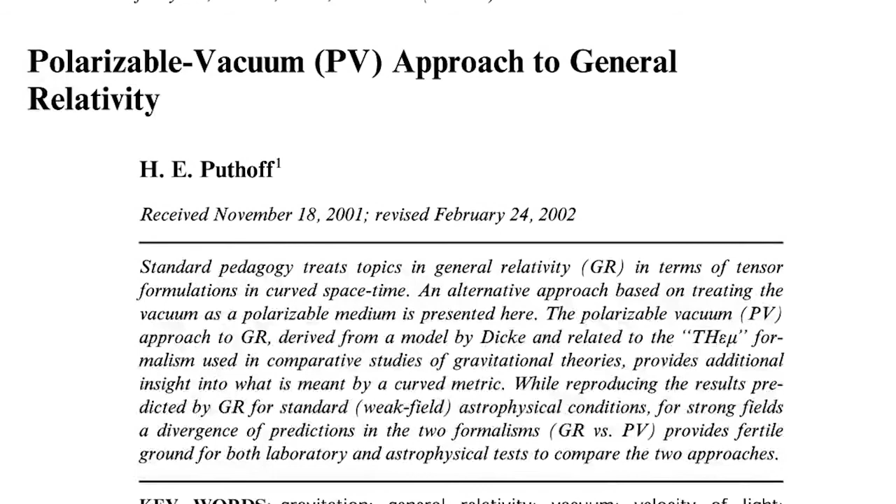And so as I went through these papers and I would talk to Hal, he would explain to me, well, this means that this is a certain process, a polarization process that happens in the vacuum of space-time, and when you do that, you have this kind of phenomenon. When you do that, you have this other phenomenon. And the papers that he wrote started to indicate this zero-point energy that's embedded in the environment was responsible for the effects of inertia and gravity and mass, and the reason why, as you accelerate through space-time, the mass of your vehicle increases.

So in a sense, if you find the right way to do it, you can actually sort of reduce the mass of an object. And if you can do that, then of course it takes less propulsive force to push it around. It means that it can go a lot faster because it's not limited by the amount of mass that it increases to as it accelerates.

In fact, it may be a situation where the faster you go, the more energy you have available to continue the acceleration process, and at the same time the mass is becoming relatively less and less and less. So it really enables the possibility of being able to go faster than the speed of light without violating general relativity, and that was the most fascinating aspect of the whole thing.

You're drawing energy from the environment, and in the process of doing that, you're enabling the craft to not only demass itself, but basically conserve energy by using the flux in the vacuum of space-time as the power source for your propulsion system. So literally, the faster you go, the more energy you have available that you convert into propulsive force, and the lower the relative mass of the vehicle becomes. So it's actually sort of an inversely proportional kind of a relationship.

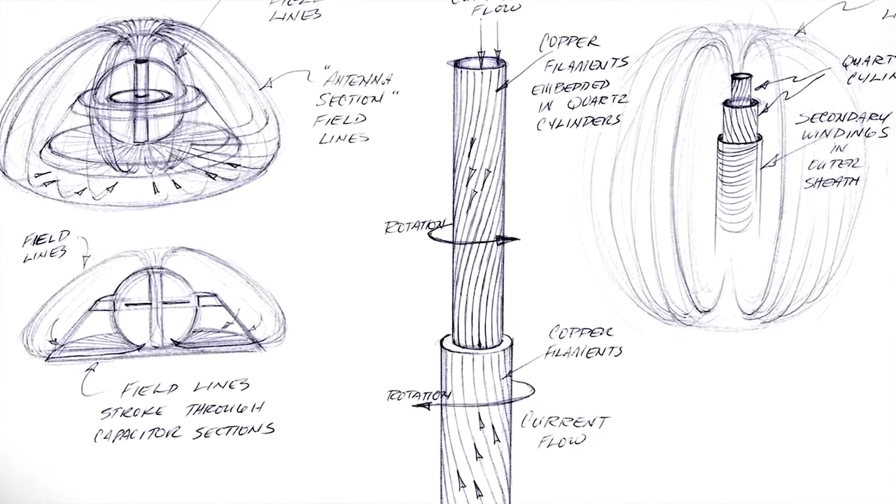And at the midpoint is this thing that looks like a flywheel. But in effect, what I think its actual function is similar to what is called a homopolar generator, where you can use the centrifugal forces of a conducting metal disc that's spinning to actually throw the electrons in the material out to the edge where they can be literally tapped off with something that looks like a brush that has conductive bristles.

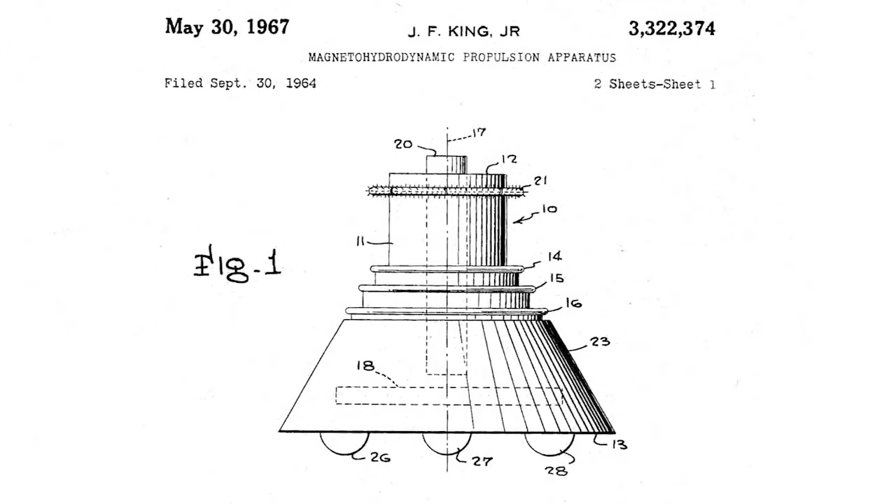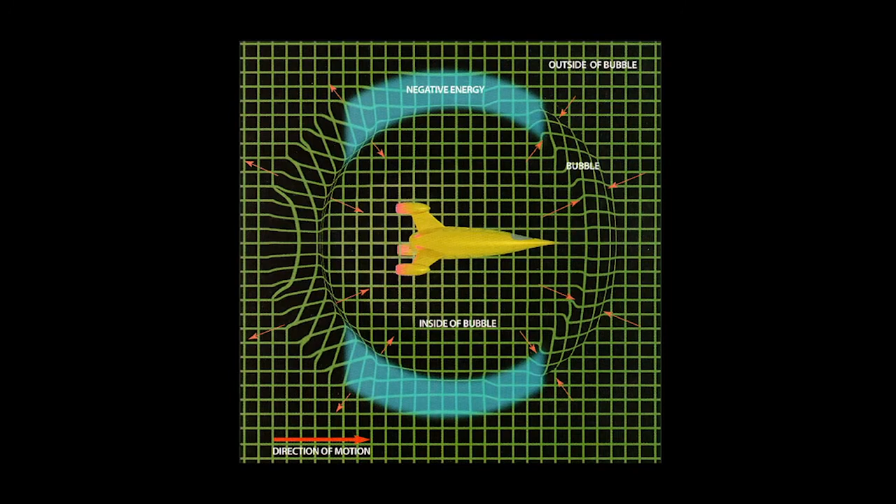Now, I believe that what happens is that this vehicle develops probably several million volts, and the sheer power of the electrostatic field that is created in this capacitor array actually has the ability to polarize the surrounding space-time, and it polarizes the so-called zero-point energy that is embedded in the space-time. So it creates kind of a positive and a negative aspect to the status of that zero-point energy that's surrounding the vehicle.

So just to give a little background, the idea of a space warp works on the principle of expanding and contracting space in such a way that allows you to go somewhere very, very quickly. What this does is it leads to something that was described by Alcubierre in his 1994 paper on warp drive, the creation of a warp drive that would not violate general relativity.

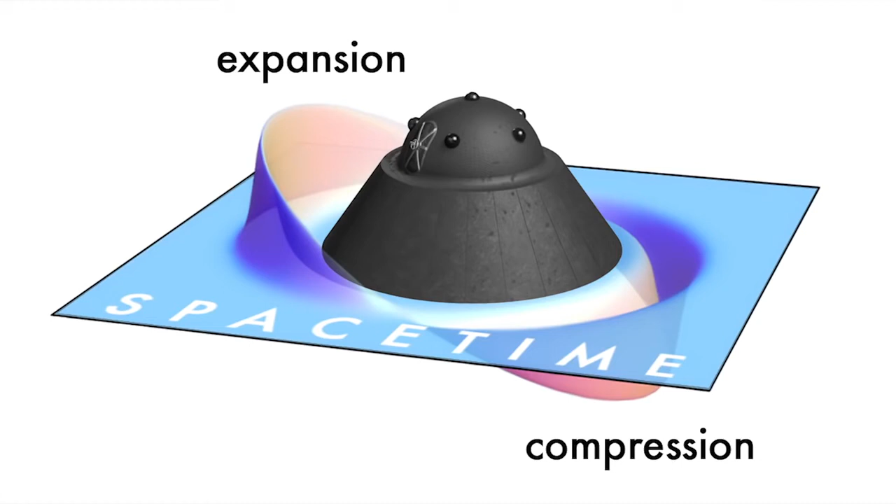And one of the things that he was suggesting was that you would be able to engineer a vector or a pair of vectors in space-time that would, on the one hand, cause a compression of space-time ahead of the vehicle and an expansion of space-time behind the vehicle, and that there would be an intervening space between those two phenomena that would pretty much peg your sense of gravity, your sense of inertia to the environment that you departed from when you initiated this movement.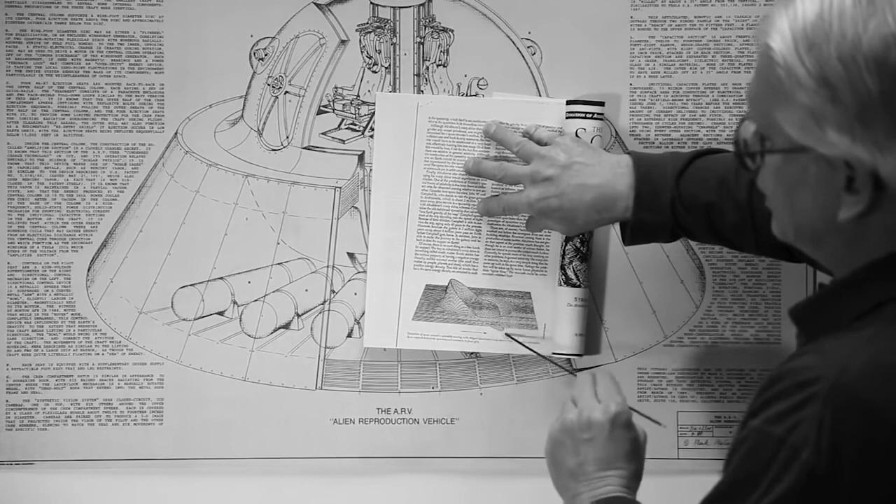So in essence what you have is a spherical event horizon around this particular region that might be called a dynamically engineered local space-time. And this particular region is set up in such a way that it creates these influences in the surrounding metric in such a way that it also creates a vector that goes in this direction. And so it's almost like having a black hole ahead of you and an expansion of space-time behind you. But the actual environmental conditions that you experience inside the spacecraft are pretty much pegged to the time and place that you start out from.

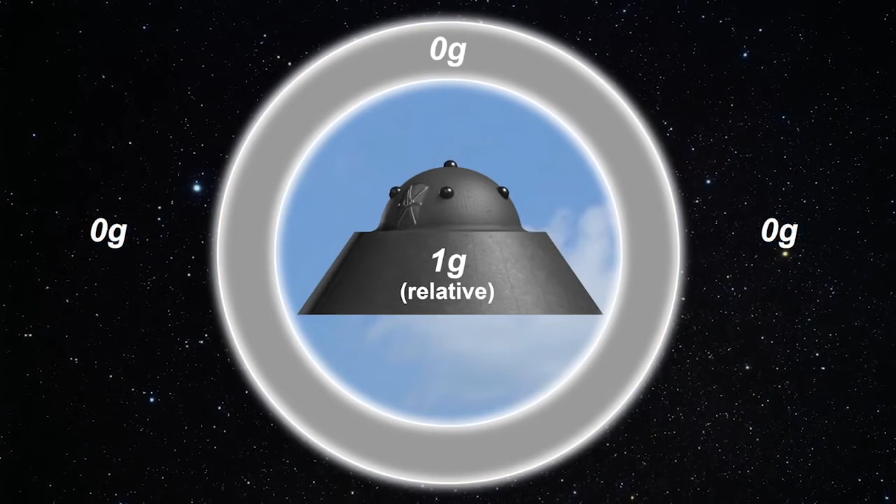So you don't have any sense of g-forces or being moved around. You don't have any sense of acceleration, because the entire pocket of space-time that you're encapsulated in is being accelerated by the vectors that are created around the system. So it's uniformly accelerated. The space-time pocket that you've created, the vehicle itself, the crew, the cargo, everything is moved as one complete package, and so there's no sense of acceleration.

But what it allows for, according to Alcubierre's calculations, is what he was calling an arbitrarily large speed, which suggests something in excess of the speed of light, superluminal speeds. So to the person that's inside the vehicle, it may appear that you begin to accelerate away from a particular location, but to the person who's standing outside the disturbed region of space-time, it looks as though you were just gone, in an instant.

So this is an ARV, isn't that what it's called? That's what some people call it. We call it RAM, Replication Alien Machine.

Oh, I see. Many highly credible reports of UFOs share a few key descriptions of how these crafts behave. They appear to have the ability to accelerate to extremely high velocities at will, far faster than any man-made craft, as if the speed of light maybe isn't any big deal. They can stop on a dime and turn at random angles while traveling at these crazy speeds, like the forces of mass and inertia, which would flatten anyone in a normal situation, also aren't a problem. And they're silent, without any visible rockets, jets, or exhaust of any kind, like they're pulling the energy they use out of thin air.

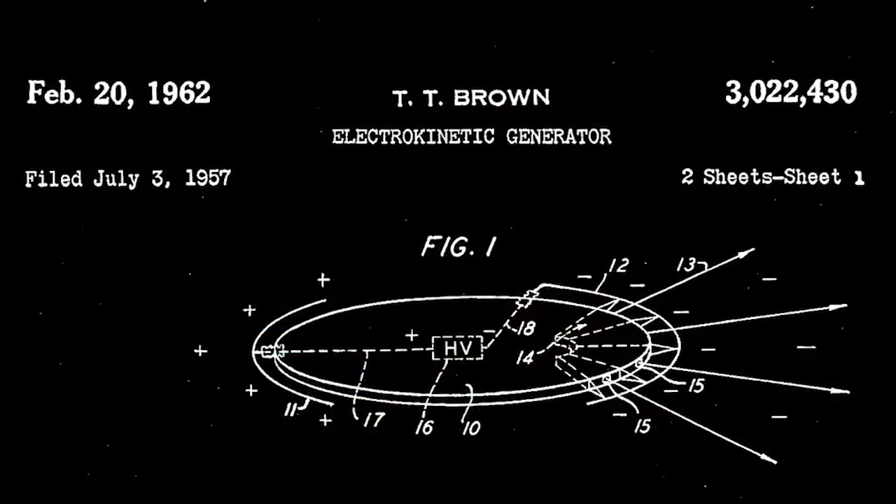Once we retrieved, back in the 30s and 40s and 50s, several of these extraterrestrial vehicles and began to study them, we combined that knowledge with knowledge we already had. Because remember, we had some people like T. Townsend Brown who were studying anti-gravity quite independent of this issue back in the 20s, 30s, and 40s. But when their information got combined with studying these spacecraft, they figured out, this is how they're working.

And according to the latest revelations in quantum physics, all this is possible by tapping into the sea of raw energy we're all just floating around in. There's plenty of energy in the pure raw vacuum. In the new physics since quantum mechanics, the vacuum is a source of energy, but it's a peculiar kind of energy. Let me explain the peculiar kind.

When a bird flies in and sits on a power line, he sits on a very high potential. But between his 2 feet, he has no potential difference, no voltage. And so even though from the line to the ground it may be 100 million volts, the little bird can sit very happily with his feet on this supposed 100 million volt line, and he has no volts across his body. He's very happy and doesn't even know it.

Let him touch one of his feet to the slightest thing that has the slightest difference there, and he'll fry to a greasy spot. Now, in the vacuum, we have the same thing. We have an extremely high potential or charge of the vacuum, but we're immersed in the vacuum.

So they were modeling the universe as being sort of this empty, material-free environment that had this energy that was embedded in it, almost like a fluid in a way, that it had all of this potential that you couldn't see until you found a way of driving it out of this homogeneous sort of state of equilibrium and getting to do usable work.

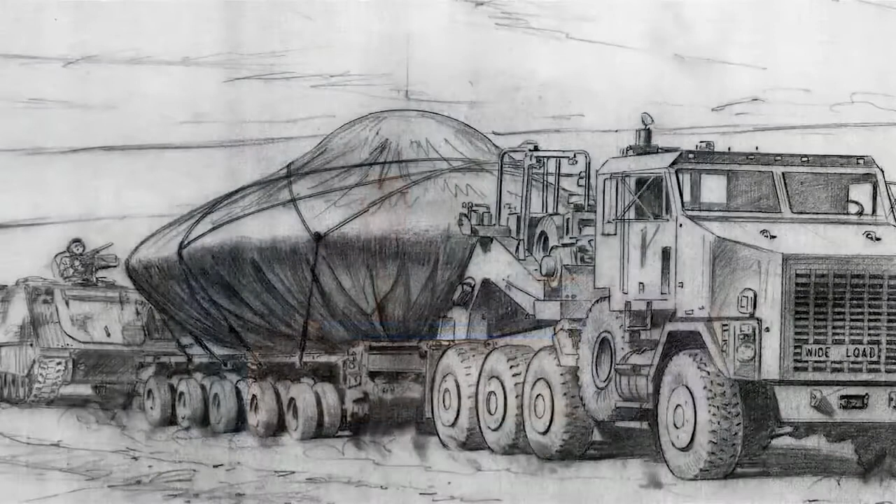The reason it's called alien reproduction vehicle is that it's based on the study of extraterrestrial vehicles, but it is manufactured by human military intelligence, aerospace contracting arrangements. We have studied specifically extraterrestrial vehicles which have been retrieved. The breakthroughs in that research have led to applications that have led to the building of this and similar anti-gravity devices.

I mean, you can understand how corporations... Brad told me that it had a big impact on his life, because when his name started popping up on the internet associated with the ARV story, there were a lot of his Japanese clients that wouldn't have anything to do with him because they did not want that kind of reputation-tarnishing information associated with their product and their brand. And so he did everything he could, and I've minimized my mentioning of his name, except where it comes to historical documentation of what's happened to him and I and other people I know.

But I feel terrible in some respects because I was encouraged by Dr. Greer to name names on camera, and I wasn't ever really sure what doing that meant in terms of protecting identities or protecting people, other than making some footnote in history that this person came forward, said something, and then whatever happened, happened.

I had threats on the phone. I had the IRS come up and take all my money, take all my cars. In fact, that's what happened to a guy in Canada. He had a machine the size of a shoebox that was supposed to put out enough power to power your home, and it was very unusual. Well, he was very open. He would give demonstrations. He wanted some investor to give him $1 million to sell the rights, and he was doing all the wrong things.

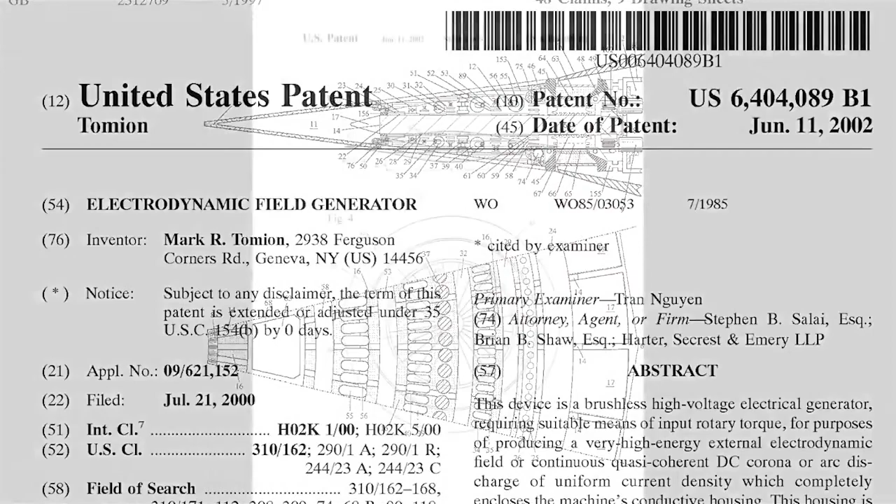Arie M. DeGeus, an inventor of a patented revolutionary clean energy technology associated with the zero-point field, was found nearly dead in his car at an airport in 2007 and died a short time later. He missed his flight to Europe, where he was about to obtain substantial funding for his work. Then there's Mark Tomion, a brilliant physicist and inventor of the patented Star Drive, a system remarkably similar to the ARVs in its use of zero-point energy and related spaceflight applications. He and McCandlish had corresponded numerous times before his unexpected death in his home in 2009. This was 2 weeks after the successful trial of a working prototype for a key component of his system.

And if I woke up tomorrow on the other side of the veil, I wouldn't be surprised, honestly. I really wouldn't. Because I know how serious the technology is. I know that it's real. The storyline basically is that there's a lot of work going on in the aerospace industry that would indicate that we have black projects that have gone even darker, and that there's work being done on electrogravitic, on scalar technology, etc., that we don't even think those in Congress or even in the military that approve black budgets are aware of.

I've seen copies of inter-office correspondence among defense contractors that openly stated that they felt the technology was a fundamental enabling technology, that it had all kinds of different defense applications, but it also had a lot of serious civilian applications that would be beneficial to humanity as a whole, to the environment. It seems obvious that someone, perhaps a group, maybe some kind of a rogue civilization within our society, has captured the technology. They're exploiting it for their own aims, for their own interests, whatever those might be.

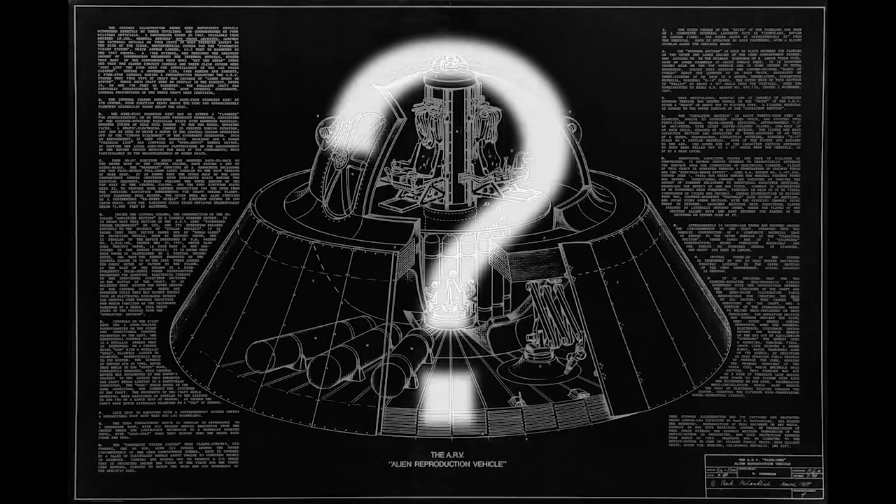So, you're kind of left with a big question mark as to where's all this advanced technology going and what's it being used for? If there was somebody that had this sort of interstellar trade program going on with another civilization, that would be very interesting, but I can't understand why they would want to keep that quiet. It would seem like such a mind-expanding, enlightening thing for people to know about. Maybe we'd stop shooting at each other and start thinking about how we can get along with the people on stars or star systems that are around us. So it's hard to say.

Hello, I'm trying to look cool. Do I look cool? Hey. Yep, this is me on camera. Okay.